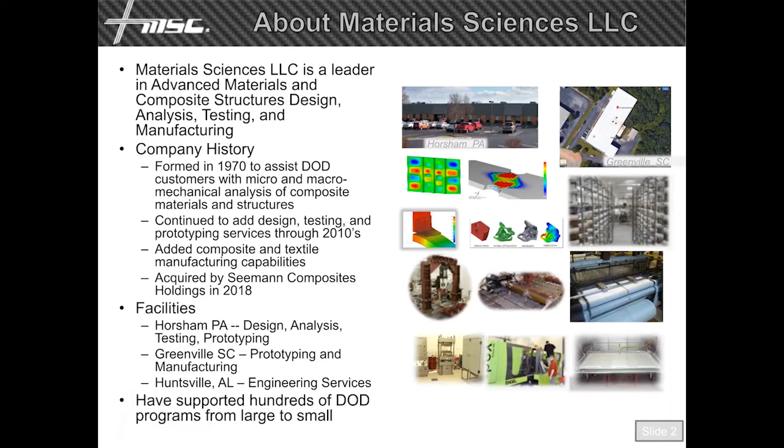So what's this program all about? What is the challenge that needs to be met? Well, as most know, additive manufacturing and 3D printing has been dubbed a potential game changer for design and manufacturing. Additive manufacturing offers the potential for highly tailored, lightweight designs with rapid turnaround times. This is mainly through eliminating geometric design constraints associated with machined structures, as well as eliminating the need for design and manufacturing of molds. There are 2 main additive manufacturing techniques: metal printing and polymer printing.

Metal printing, such as powder fusion techniques, offers high-strength materials, but often comes with weight and cost penalty. Polymer printing, such as filament deposition or stereolithography, offers lightweight and low-cost materials, but often comes with performance limitations since neat polymers typically do not meet stiffness and strength requirements.

Despite these limitations, there are numerous transition targets that can benefit from additive manufacturing, including underwater vehicle components, tooling for shipboard maintenance, diver equipment, antennas, and many others as listed here and shown to the right.

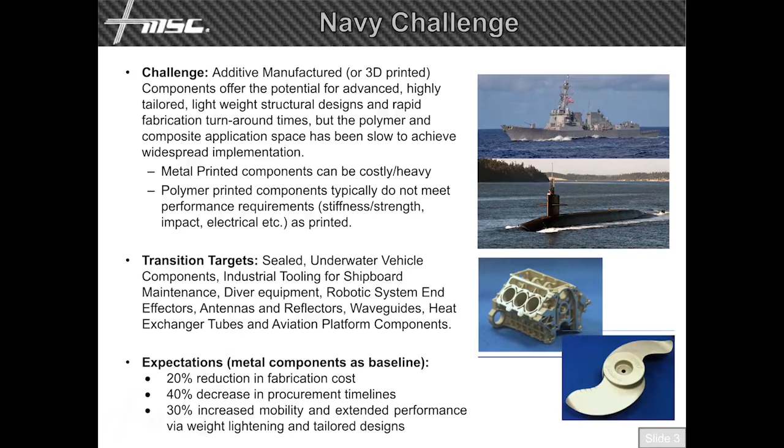Overall targets for implementing additive manufacturing structures include reducing fabrication costs by 20% or more, decreasing procurement times by 40% or more, and increasing mobility and performance by 30% or more, mainly through lightweighting and using advanced design techniques such as topology optimization, which allows for much more organic-looking shapes.

But to implement polymer printed parts, there is a need to improve strength, durability, and thermal resistance, particularly for mission-critical and safety-critical parts in Navy ships. Simply put, additive manufactured polymer parts have the potential to reduce cost and lead time, but need improvement in performance.

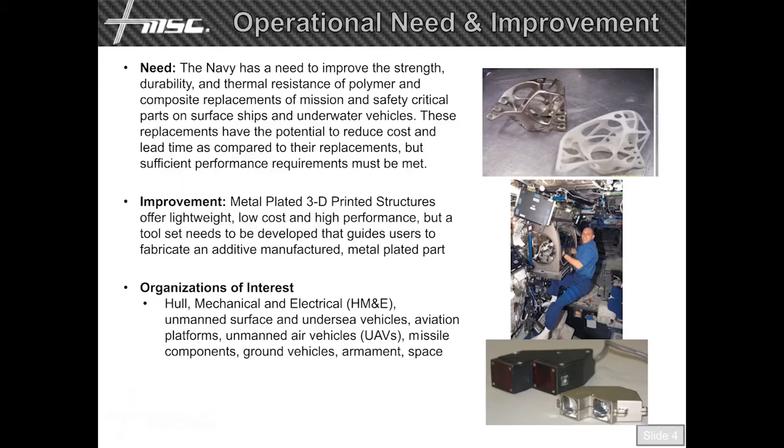However, integrating metal plating over an additive manufactured part is a relatively new concept where design tools are still needed. They are needed to help designers take full advantage of both additive manufacturing and metal plating. Organizations that are interested in using a better designed metal-plated additive manufactured part include Hull Mechanical and Electrical Systems and Engineering, UAV Systems, Missile Components, Ground Vehicles, Armament, and Space Applications, just to name a few.

So to solve this problem, Materials Sciences, along with its subcontractor Repliform, located in the Baltimore, Maryland area, is developing a knowledge-based tool set for designing and manufacturing of lightweight, metallic-coated, additive-manufactured polymer structures. If done properly, we can retain the low-cost, fast turnaround times offered by additive manufacturing, but improve overall structural performance and add multifunctional enhancements, which is always the holy grail of any structural design.

The tool set that's being developed includes a manufacturing design guidebook that includes best practices, design constraints, proper surface finishes, and other design parameters to allow designers to properly design a plated polymer part.

Electroplating modeling tool sets are also being developed, where scripts and algorithms will link material models, electroplating simulations, and global structural analyses, i.e. finite element analyses, to provide a full design and simulation cycle. Ashby charts will also be part of the toolset, which will ensure designers that per application, plated polymers is the most optimal compared to other materials. And finally, quality assurance and test plans will also be provided to help qualify the part for service implementation.

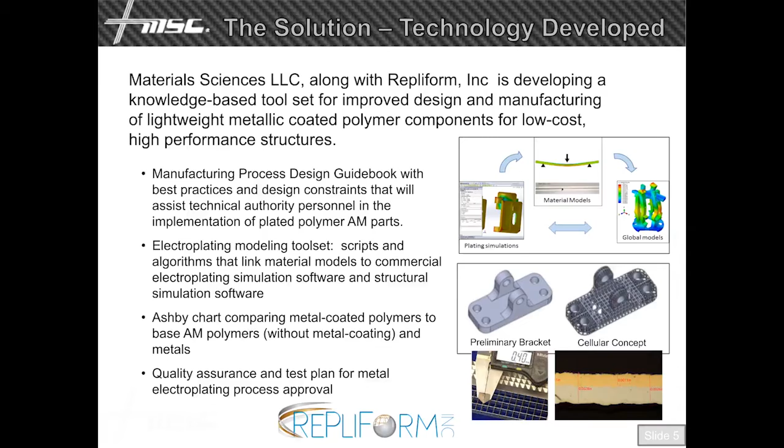The current status of this program is as follows. The Phase 1 program was initiated on the Army and picked up by the Navy under Phase 2. We are currently in the Phase 2 base portion of the program. Under the Phase 1, plated 3D printed coupons were made and tested, where results showed a 40 to 80% increase in strength over unplated parts.

Also in the Phase 1, analog parts, namely a complex bracket roughly 3 inch by 3 inch by 3 inch in size, was printed and tested to represent a more real-world application. Here, structural performance was shown to increase by 2 times, while reducing cost by 50% as compared to machining an aluminum bracket. We are currently in the Phase 2 base portion of this program.

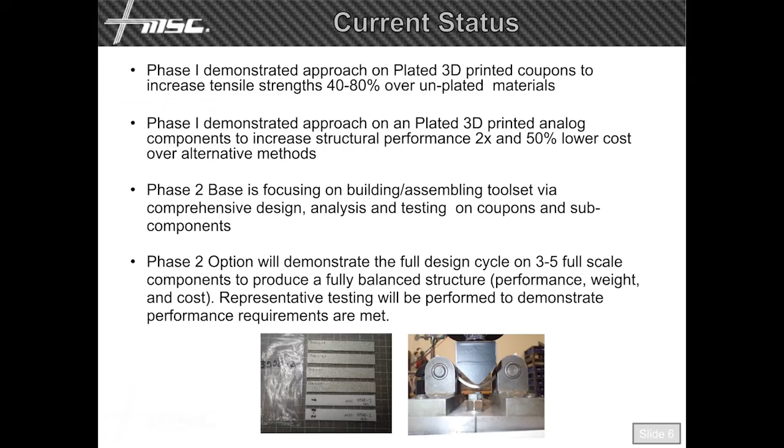We are currently building and assembling the toolset via comprehensive design, analysis, and testing of coupons and subcomponents, with coordination and guidance with the Navy technical point of contact. We're currently waiting on the Phase 2 option. The Phase 2 option will focus on demonstrating the technology on 3 to 5 full-scale structures to balance performance, weight, and cost. Materials Sciences possesses full-scale testing capabilities, where representative testing can be performed to demonstrate that global performance requirements are met.

The key benefit of this toolset is to improve repeatability and reliability of designing and using metal-plated additive manufactured parts. This is done by A, ensuring the design has uniform coating thickness, so performance is consistent throughout all sections of the part. B, ensuring accurate predictions on part performance and thus increase part reliability. And C, providing a more optimized design by getting the best balance of cost, weight, and performance.

This toolset is focused on electroplating techniques. When designed properly, it has advantages over other standard plating techniques. For example, spray coating generally needs thicker coatings to achieve performance enhancements, while surface finishes tend to be rough and defect-rich. Vapor deposition coatings tend to be brittle, and thus better suited for electrical enhancements, such as EMI and ESD performance needs. And lastly, cladding or foils tend to be better suited for larger planar surfaces, which is generally not the case for additive manufactured designs, which generally are more geometrically complex for lightweighting.

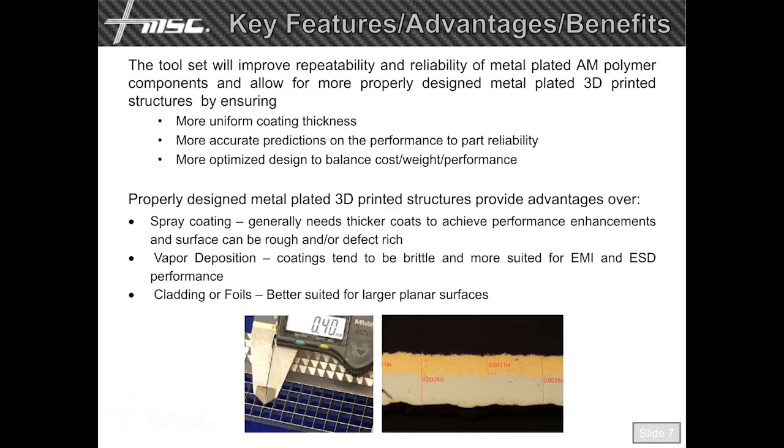To transition the technology to the fleet, the first step is to demonstrate it on 3 to 5 full-scale articles. This will be performed under the Phase 2 option if awarded. A Phase 2 enhancement will be needed to perform field tests and field validation. Afterwards, short-term plan is for Materials Sciences and Repliform to continue to utilize their subject expertise and provide engineering services to the Navy to demonstrate this technology on a case-to-case basis. Medium to long-term plan is to train Navy engineers on how to use the tool set so they can develop in-house design capabilities at a depot level. To do so would require PEO support to establish training requirements.

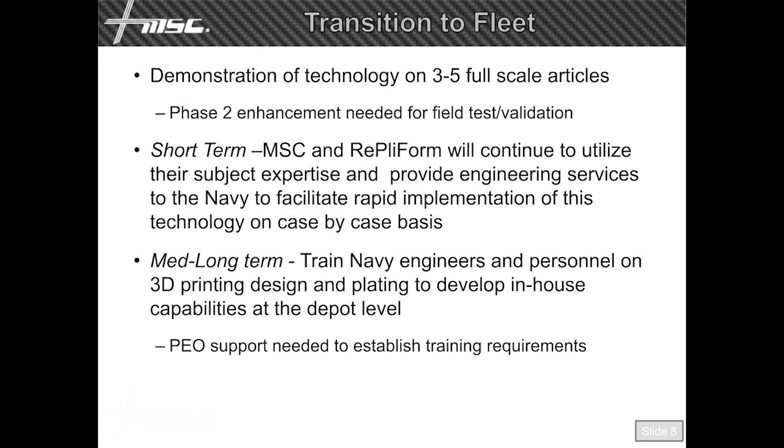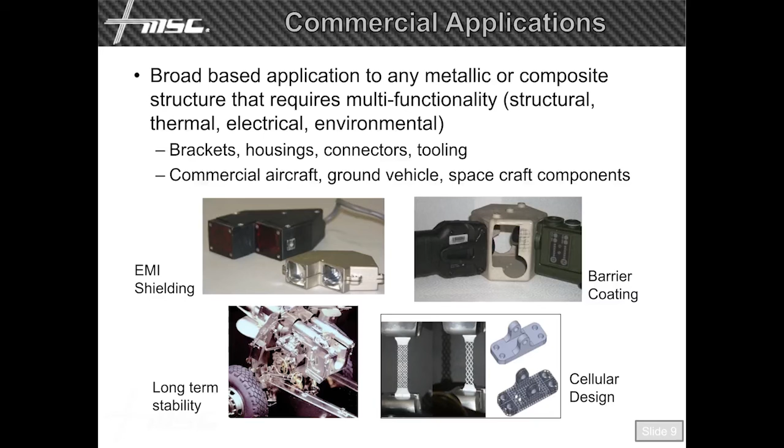There are broad-based commercial applications for this technology, where any metal or composite structures can be replaced with a more lightweight, low-cost, multifunctional metal-plated additive manufactured structure. This includes brackets, housings, or connectors that may need EMI shielding, environmental barriers, or long-term stability as needed in space and aerospace application. Cellular designs, as shown in the bottom right, can also be applied for additional lightweighting and design optimization. Thus, commercial aircraft, ground vehicle, and spacecraft components are all potential applications.

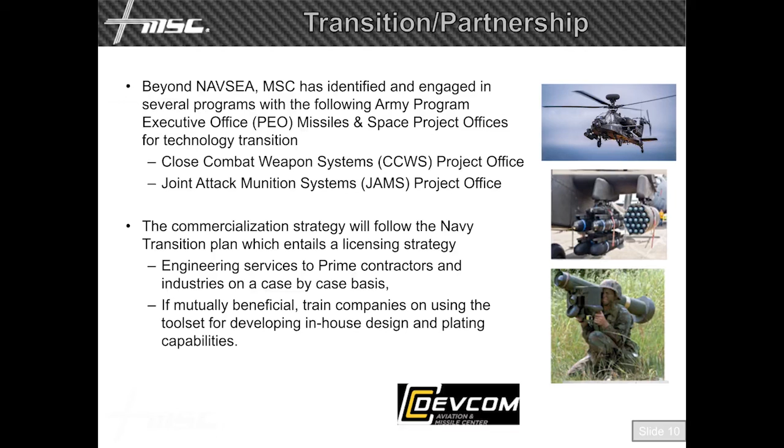In summary, Material Sciences is developing a toolset for designing and fabricating metal-plated additive manufactured structures that offer lightweight, low-cost, and multifunctional performance.